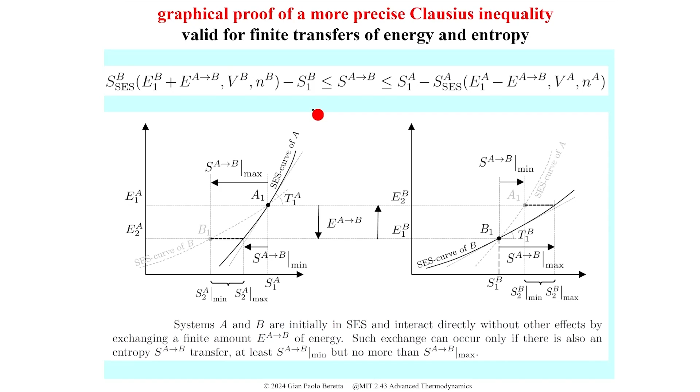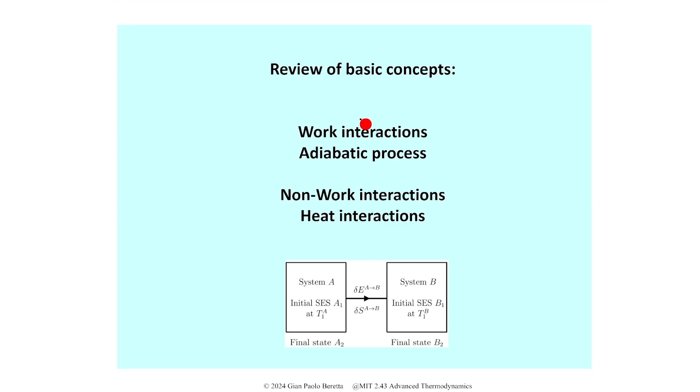So that turns out to be writable as a couple of inequalities. The traditional Clausius statement is, as we've seen it, for infinitesimal amounts of energy transfers. This is for finite, but the concept is the same. So today I wanted to talk about some traditional results. And we still need to define what we mean by heat. First of all, we define what we mean by work.

So work is a mode of interaction in which there is no entropy transfer and no transfer of amounts of constituents. That's, for example, what happens in a weight process. In a weight process, if during the entire process there are no external effects, then the system experiences a work interaction. As you may read here, it says that a weight process may be adiabatic. We call adiabatic process a process in which there are only work interactions. Why may be and not is adiabatic?

Well, because a weight process is a process in which the only net external effect is the lifting or lowering of a weight. The net effect. But you could have some temporary effects that are initially done and then undone, which may not be describable by lifting or lowering a weight. So in that case, it's still a weight process, but during the process there were interactions that may not be work. But for simplicity, a good example of an adiabatic process is a weight process in which there are no entropy transfers all along the process.

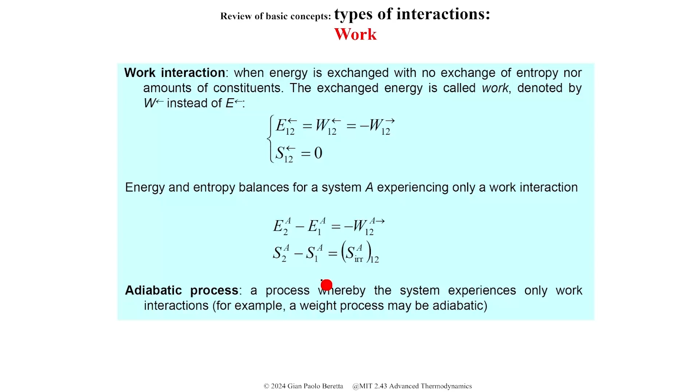Anything that has an entropy transfer, we call it non-work. So non-work is a very broad class of types of interaction. And in this broad class, there is one limiting condition that we call heat interaction. We will see in a moment what's the defining idea behind what we call heat. It is a limiting process, and it doesn't exhaust all the possible non-work interactions. So not all non-work interactions are heat.

And in fact, I already anticipated last time that during a heat interaction, we have a very well-defined ratio between the energy that is exchanged, that we call heat, and the entropy that is exchanged. Energy over entropy is the temperature at which that interaction occurs. So in order to characterize a heat interaction, we only need to say it's heat, how much energy is transferred, and what is the temperature at which it is transferred.

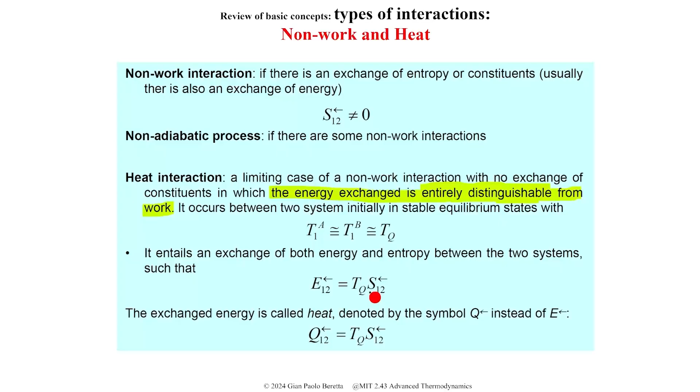But what's the defining criterion for heat? One way to put it is we want to define an interaction which is completely distinguishable from work. So an interaction in which these two systems, say system A and system B, exchange energy and entropy, and no fraction of the energy that is exchanged between the two can be recognized as work.

What does it mean? All right, we do it operationally. Let's say that we extract some energy from system A. And let's suppose that we intercept that energy, and before giving it to B, we feed it to some machinery that will try, at its best, to split that energy into a part that is recognizable as work and the rest.

Okay? So this, traditionally you would call it a Carnot engine, or let's call it a cyclic machinery. Cyclic because it has to return to its initial state, and so whatever it does, it's not because you consume the machine, but because of the operations of the machine.

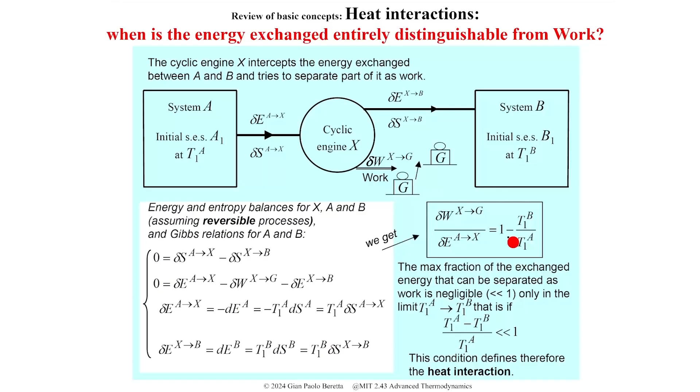We will call heat only in the limit in which this ratio goes to 0. And that goes to 0 only in the limit in which the two temperatures get equal or very close to one another. And in terms of that train of inequalities we have seen, the Clausius inequality last time, that interval of values, if the two temperatures are equal, shrinks to a single value, and therefore we get a definite entropy transfer for a given energy transfer. And that's how we get the famous equation that delta S, the entropy exchanged, is the energy exchanged over T, so Q over T.

And of course, I have stressed it so many times, but we notice that we are defining heat here using entropy. Usually, it's the other way around. The traditional expositions start from some hand-waving definition of heat, and then some definition of temperature, and then Q over T becomes the entropy. That's what I call the hand-waving heuristic definition of entropy.

That, to be frank with you, is what got me started with this subject, because I was so unhappy with the way the subject was explained to me that I wanted to study more. So it's funny. You hate a subject because you don't understand it, and then you come to love it because you want to understand it.

All right, but how does this definition match with our usual understanding? Because if I ask you what's heat, you would say heat is the energy that is transferred between systems at different temperature. Well, we just said no. Heat is the energy transferred between systems at the same temperature. So is there something wrong? And in fact, there isn't. Because think of the typical model that we adopt in heat transfer.

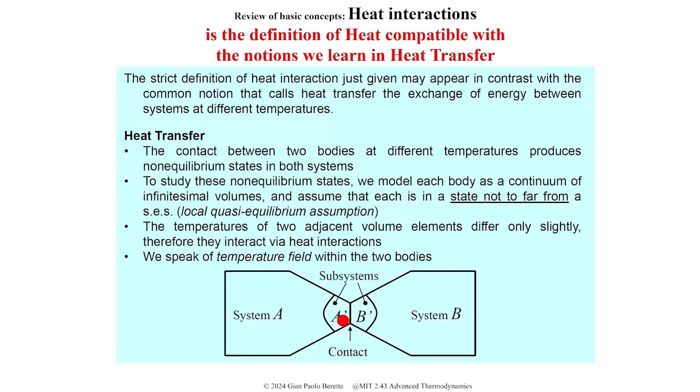This describes what I just said for, say, a solid. Suppose we concentrate on this infinitesimal element of solid or continuum, in which the coordinate is one-dimensional, between x and x plus dx. So it's infinitesimally thin, and it is in contact with the element to the left and the element to the right. For simplicity, let's study a steady state situation and make the energy balance and the entropy balance.

If I make the energy balance for this lamina, I put on the left-hand side the rate of change of the energy of the lamina, and on the right-hand side the net contributions of the interactions to which it is subjected. Assuming it is a heat interaction, it receives Q dot from the left and gives Q dot to the right. If these are balanced, the energy balance says the rate of accumulation of energy is 0, so that property doesn't change with time.

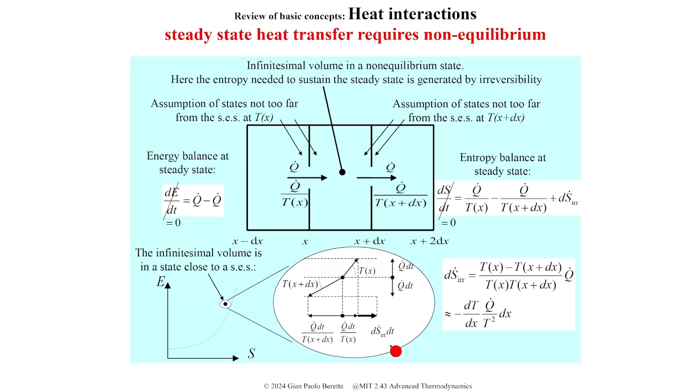But we should not take it too literally, because if we were truly in an equilibrium state, these things couldn't happen. And look at it this way. Let's say that this is the E versus S diagram of my system here, the lamina, the infinitesimal element. Now, I think I have it bigger here. Okay, so I draw the state of this lamina just a bit off the stable equilibrium state curve. And let's see what happens there. Okay, so this is the state.

The lamina receives both energy and entropy from the left. So from the left-hand side there is a pull that tries to pull the state up because it receives energy, and to the right because it receives an entropy given by Q dot over T. The net result is that the state is pulled in this direction. It wants to move there. On the other hand, there is also an interaction to the right, which takes things away. It takes energy down, so it pulls down the same amount. So these are balanced, and therefore the state will remain at this level.

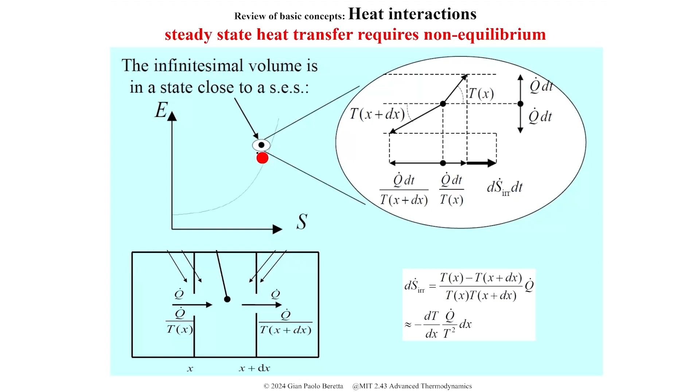This is interesting because it is the local equilibrium model that we are used to using in fluid mechanics, but you can improve. And people are doing extensions of fluid mechanics treatment in which you deal with this little difference in entropy, because maybe you can assign a temperature, but the entropy of this state is slightly less than the entropy of a truly equilibrium state at that temperature. And that difference in entropy sometimes has an importance for certain applications. Okay.

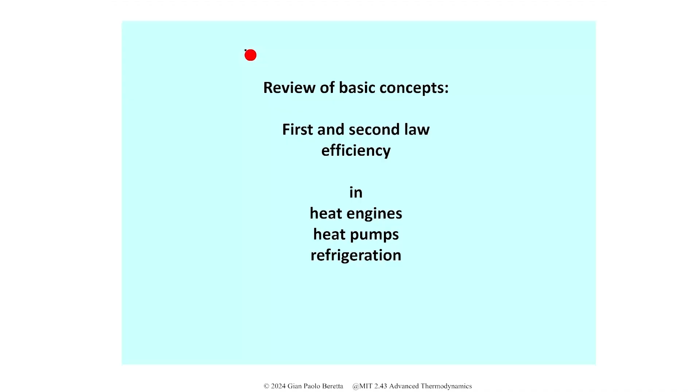So now I wanted to talk about these very traditional ideas of heat engines, heat pumps, and refrigeration units, and see the energy and entropy that flows, and also it gives us the opportunity to define what we mean by first and second law efficiency of devices like this. So let's start from what we are seeing. So let's do it our own way.

Suppose we take the Clausius inequalities that we have seen the other day, and remember that these subscripts over the inequalities indicate what the condition should be for the strict equality to hold. And here, if you remember, we have a strict equality if the system is in a stable equilibrium state and ends in a stable equilibrium state, and it is a reservoir, so that the second derivative is equal to 0.

So let's consider our system to be a reservoir at temperature TA. I drop the subscript 1 because for a reservoir there is always one temperature for all states. And let's assume that also system B is a reservoir. So also for B here I have an equal sign. Okay?

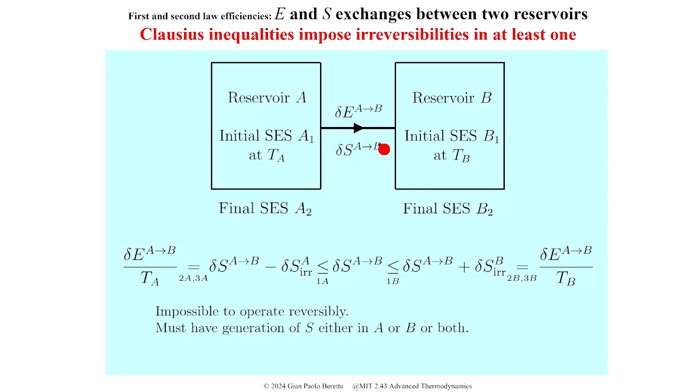So it is necessary, if I transfer energy from a reservoir to another reservoir at a different temperature, that some entropy be generated by irreversibility in either one, because there are no other systems around. But suppose we interpose a machinery in that exchange. Well, in that case, it is possible to have things operate without irreversibility, so without entropy production.

This is the entropy balance for the machinery. It says that if the machinery produces some entropy by irreversibility, it must be equal to the difference between what it puts out and what it receives. And this is the energy balance for the machinery. It says that it can produce work if it can manage to give to reservoir B less energy than it receives from reservoir A.

Okay. So it is possible to assume that everything has no entropy produced by irreversibility. So no delta S here in system A, no delta S here in system B, and also no delta S here in system X. In that case, from the entropy point of view, the machinery simply passes the entropy that comes from reservoir A and gives it to reservoir B.

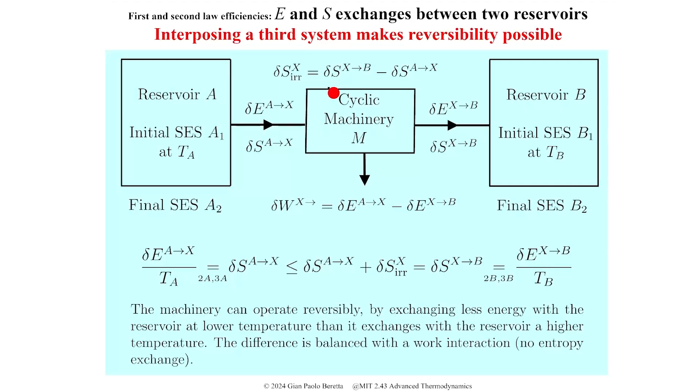But the machinery is there just to recognize that in order to pass that entropy to system B, it doesn't need to give it all the energy it received from A. There is an unbalance, a difference, which can be transferred out by means of an interaction in which there is no entropy transfer: work. Okay, so that's the idea of the heat engine.

Machinery that receives heat from a reservoir at high temperature. This is a heat engine between thermal reservoirs, because you could also have heat engines between systems that are not reservoirs. You take a big piece of steel out of a steel making plant, and I want to recuperate the energy that it has before it cools down. That's a way of recovering energy from industrial processes. And of course, as I cool it down, the piece of steel decreases its temperature, and so it's not a reservoir.

That doesn't mean we cannot compute also for that situation what is the maximum work that we can extract. But that's another situation, and the maximum work we can extract in that case is not the Carnot coefficient. Whereas here, if you do energy and entropy balances, and here they are, I'm going quickly and not into the details, I'll just give you some ideas by following the flows of entropy. But here is the full glory of the balance equations for the machinery, from which you can compute the work.

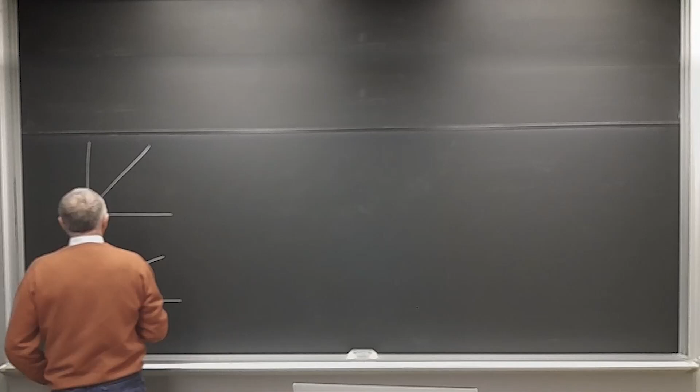Let's view it from the point of view of entropy flows. Actually, maybe we can also do it in terms of E versus S diagrams. So this is reservoir A, and this is reservoir B. And I'm extracting some energy, so I want to take this much energy out of system A. Clearly, there are no states here, so I need to extract also some entropy, at least this much.

But in order to extract that entropy, I need another system. That's why I need reservoir B that picks up that entropy. And so it will end up here, provided, since there are no states to the right of the maximum entropy, I also provide some energy. And that energy is this much. It's Q received by B.

Okay. So the difference between this and that is the work. You can also, if I draw a line with the slope of reservoir A here, this is the work that I have extracted. Actually, this is W rev, because I have assumed that system B takes just barely the entropy that is being received by system A. So the entropy comes from A. The machinery doesn't add because it's reversible. It doesn't produce additional entropy. It simply has to transfer it to system B.

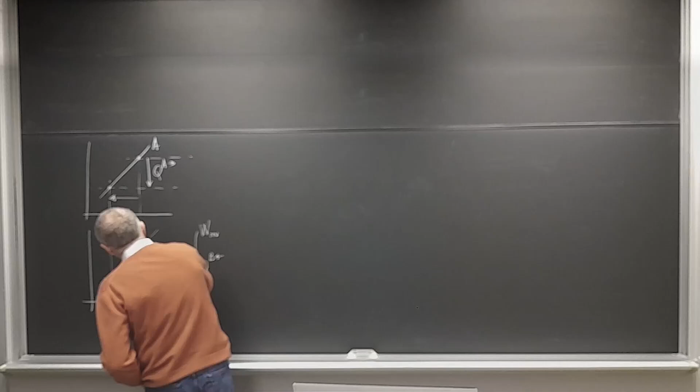If we have an irreversible operation, so if the machinery is irreversible, like most practical machineries, and therefore it produces some entropy, that entropy will also need to be disposed of into the environmental reservoir, and therefore it will require more energy to flow. So in system B, I need to add not only this entropy, but also the entropy that is produced by irreversibility. So that is S produced in the machinery, and the machinery is called M. Okay.

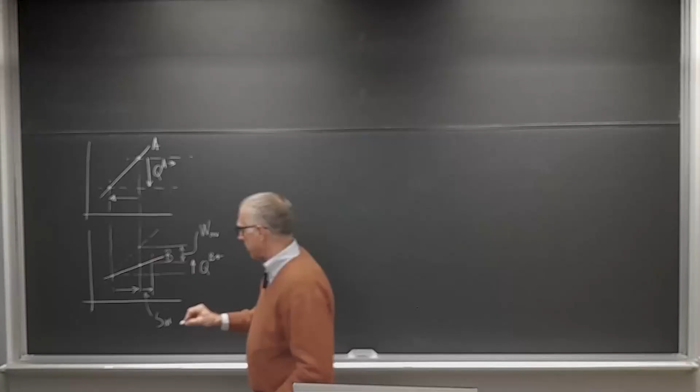So system B ends up here. The amount of Q is higher, and therefore the amount left, the difference, which is what will be transferred as work, is less. Okay. Good. So we have seen it in various ways.

Now, typically, one defines the efficiency. Actually, most of you probably remember that this ratio is not called the Carnot coefficient like I'm calling it, but it's called Carnot efficiency, okay? Which is true in the sense that I can define an efficiency. We are going to call it here first law efficiency, as the ratio of the useful work divided by the energy of the resource that you have used. In this case, the resource is the hot reservoir, so the energy extracted from the hot reservoir. So this ratio is the first law efficiency.

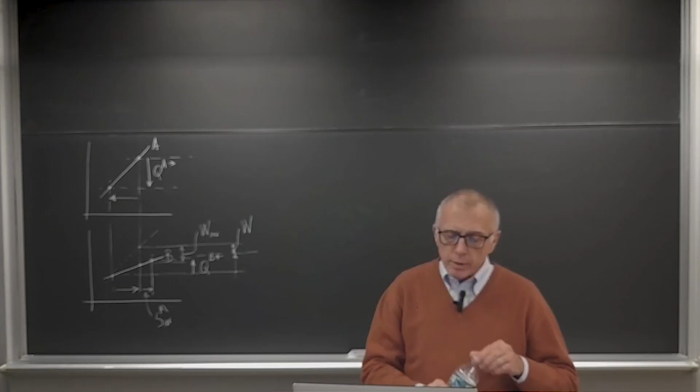What is somehow inconvenient of first law efficiencies is that usually one says, if something is 50% efficient, why aren't you doing better? There is 50% room for improvement. Not here, though, because there is no way. Suppose you have TA equal to 600K, and TB is 300K. So the Carnot coefficient is 1/2, 50%. That's the maximum you can do. There is no improvement. You cannot improve.

So people have introduced the second law efficiency, which compares what you actually obtained, in the numerator, to the maximum that you could have obtained given the constraints and the physical laws, so without violating anything. Okay, so in that case, this ratio for the reversible case is 1, so it's 100%. And if the efficiency is 100%, there's no room for improvement.

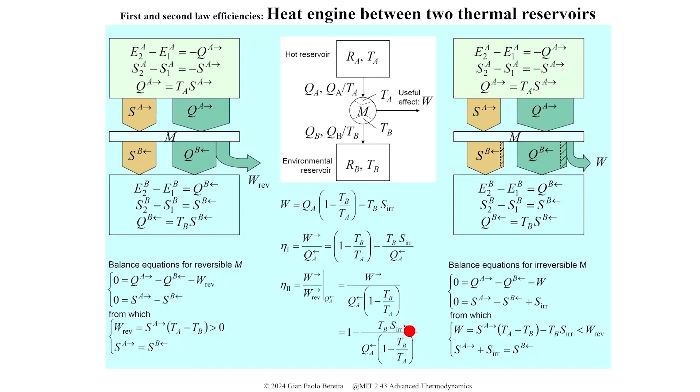Okay, so let's do even more quickly the same idea, but for a refrigerator unit. It's again a situation in which I have two reservoirs, TA and TB, and I identify the environment as the system at higher temperature now, and the other system at the lower temperature is, for example, the refrigerator cell, the room that you want to keep refrigerated.

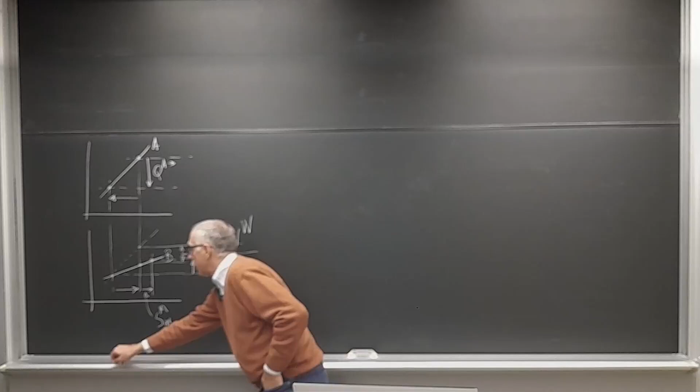And you want to keep it refrigerated, so since typically there are heat losses from the walls of this refrigerator, you need to compensate by removing heat. So the unit wants to extract heat from a reservoir which is at lower temperature than the environment. So let's do again the construction here.

Now I have my system B, which is the refrigerator room. You want to extract energy. And as usual, in order to extract energy, you need to extract also entropy. So this is QB out, and this is SB out. So if I have this entropy going somewhere, I need to put it to another system.

Now this system A, which is my environment, is there, and I would like to give it this much entropy. But in order to give it, I also need to give some energy, which is actually higher than this one, because the environment is hotter, so it has a higher slope.

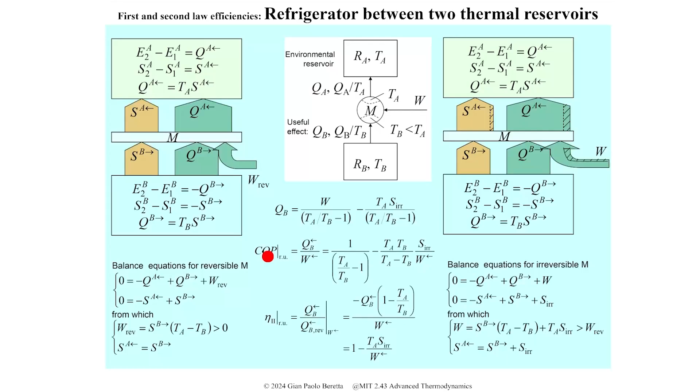The last of this series of traditional machineries is the heat pump. The heat pump is very similar to a refrigerator, more or less the same equations, except that now what switches is the position of the environment, the environmental reservoir. Whereas for the refrigerator you were extracting energy from something colder than the environment, in the heat pump you want to put energy in a reservoir which is hotter than the environment. So now the environment is system B.

But the idea is more or less the same, except that the useful effect now is not the cooling of B, but the heating of A. You want to heat up something like the house using a heat pump, which is nowadays being done worldwide, at least in places where you need heating in the wintertime. And so the useful effect is QA. Therefore, you define a different COP. It's called COP, but it's a different definition.

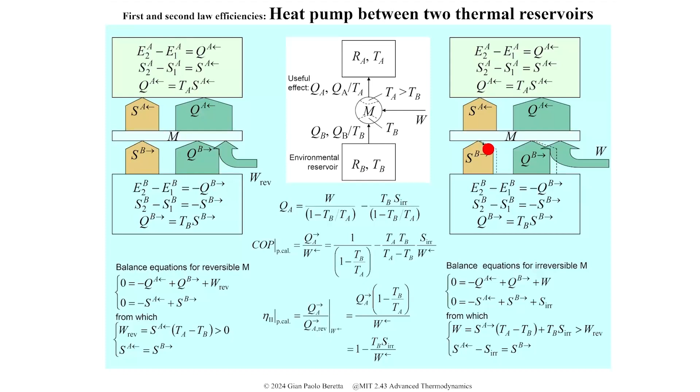So since now we are talking about some practical aspects, let's talk about another chapter of thermodynamics that has to do with establishing the properties of substances at stable equilibrium. This is an important chapter. Many scientists have devoted their lives to constructing the properties of substances. For example, to stay here, Professor Keenan in 1940, or maybe earlier, spent a lot of time developing the steam tables, which are the properties of water.

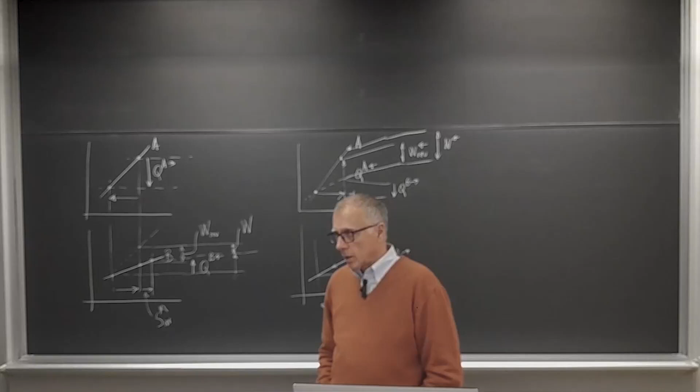So how do we measure properties of substances in stable equilibrium? Well, many of the tools that we have are related to the conditions for mutual stable equilibrium that we have developed, like equality of temperature, equality of pressure, equality of chemical potentials. The good thing is that if you have a thermometer, what is a thermometer? A thermometer is a system in which, in some way, you have put a scale in which you can read the value of the temperature.

Then what you do, you stick it in contact with the system you want to measure, and you leave enough time so that you convince yourself that the two systems have reached mutual equilibrium. And if you are convinced that they are in mutual equilibrium, then the theory says that the two temperatures are equal. So by reading the temperature of the thermometer, you have measured the temperature of system A, of which you may know nothing. So it's an indirect measurement of a property.

Similarly, the manometer: you can construct a manometer so that you can read out on a scale the value here. You put it in mutual equilibrium with your system by drilling a little hole in the boundary, with either a little piston or some moving interface like here.

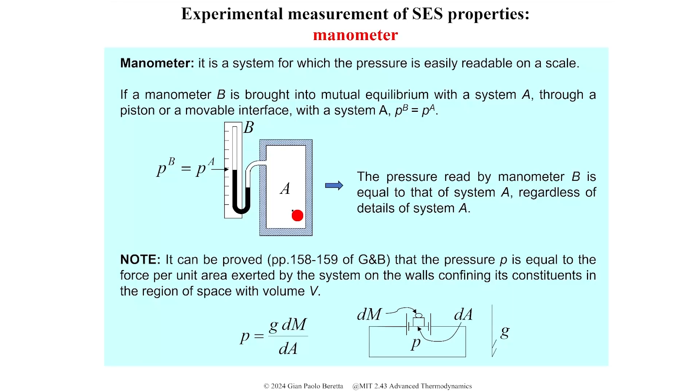If you are convinced that they are in mutual equilibrium, reading the pressure of B gives you information about the pressure of system A. So this is one way of measuring it. Yeah.

This is just to remind of that proof that I don't want to go into details of, but that shows why the pressure can be measured by measuring a force per unit area anywhere on the boundary of your system. So you take the boundary of your system when it is in stable equilibrium, drill a hole, and substitute that piece of wall with a movable wall.

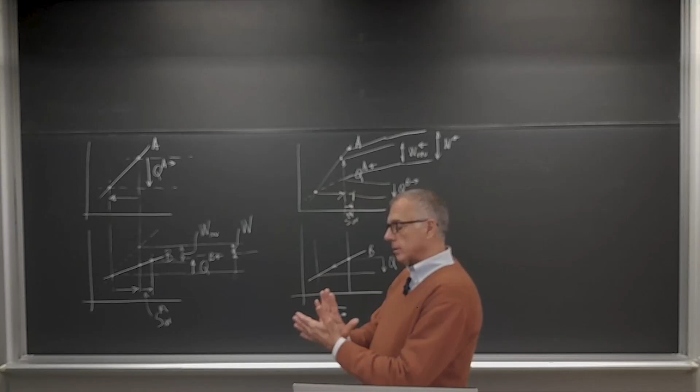And then you find a force per unit area that keeps that wall where the original one was. Once you found it, you have measured the force per unit area that balances the pressure of your system. And when you are in stable equilibrium, that force per unit area is equal no matter where you go and do this procedure. Whereas off equilibrium, you can always measure force per unit area, but it may be non-uniform, not equal everywhere. And there is no pressure because you're not in equilibrium.

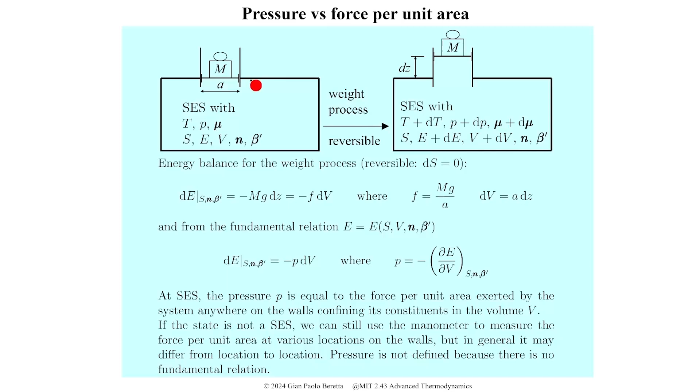Another kind of measurement that we can do is like the so-called Joule apparatus, in which you input some mechanical energy in your substance, in a piston or in a variable volume or in a constant volume container. You put some energy in, wait for the system to go to a new stable equilibrium, and measure how much the temperature has changed for your system.

So mg delta z represents the amount of energy that you have put in the form of work. So you produce a work interaction and put energy into your system. Let it relax until it reaches equilibrium, so new temperature. Compute the difference between the new temperature and the initial temperature, delta T. This ratio turns out to be equal to the partial derivative of this property that we're going to define in a moment, and that's the property that we call heat capacity at constant pressure. It's a stable equilibrium state property. We obtain it from the fundamental relation.

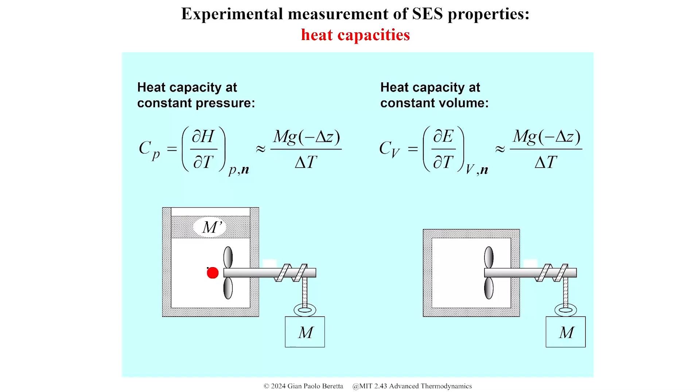There is one heat capacity that is equal to the same ratio when you do the experiment at constant volume, and there is another heat capacity when you do it at constant pressure. So let's start from the constant pressure, because this gives us also a procedure to define the enthalpy, and to get to the derivative that turns out to represent the result of this measurement. So it's important because it is the way in which you measure that property.

Let's do it starting from the fundamental relation in energy form. And this is its differential. So H, in a moment we will see that this H is a particular transform of the fundamental relation when we change variables. But for the moment, let's just take it as an abrupt definition. Let's say that we call H the sum of energy plus the product of pressure and volume. We call it enthalpy.

Then, by taking the differential of this expression and recalling that the differential of a product is equal to P dV plus V dP, and where I see dE, I use the differential that I have written up here. So I substitute, and this is what I'm left with. I can view this expression as the differential. So you see the independent variables are under the d, so dS, dP, dn. So this would be the differential of a function in which H is a function of S, P, and n.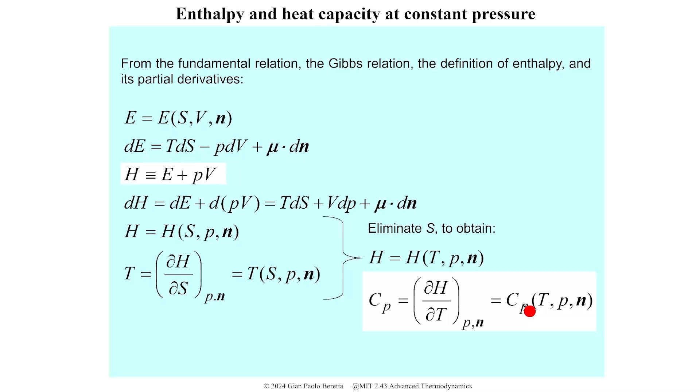So pressure and temperature we can measure. Heat capacity we can measure with this instrument here. And so this is a fully measurable function. A similar procedure we can follow to define the heat capacity at constant volume.

So we start again from the fundamental relation. And notice that the temperature, which is the partial derivative of E with respect to S, being a derivative of a function of these variables, has the same independent variables, so it's also a function of S, V, and N. And also here, play the game of eliminating the not so easy to measure property, entropy.

So solve this as S as a function of T and substitute up there to obtain a new function in which the energy is expressed in terms of the independent variables temperature and volume. These are things that are easy to measure, because temperature you measure with the thermometer, volume you measure with the stick.

Okay, so the first derivative of this function, the partial of E with respect to T, is called the heat capacity at constant volume, and it is the thing that you measure with the Joule apparatus at constant volume. So we'll take that.

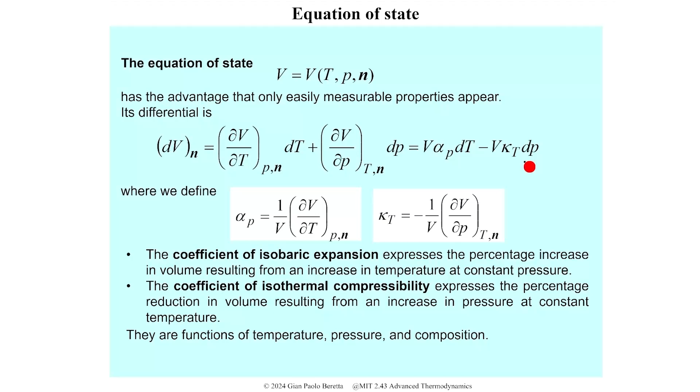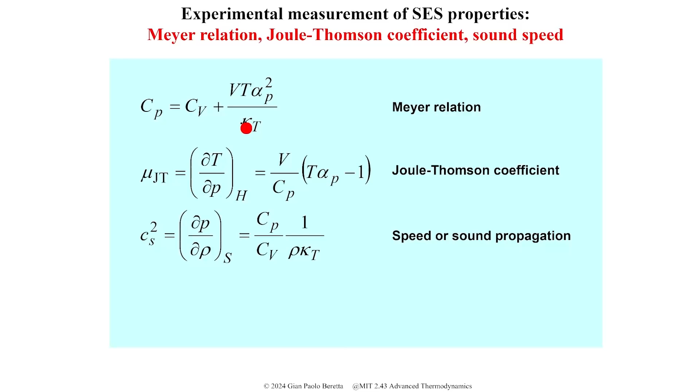And also the Meyer relation shows that Cp, Cv, alpha P, and kappa T are not independent. So you don't need to measure all four of them. You just need to measure three. Let me skip that one for a moment. No, I need it.

Okay, in order to measure chemical potentials, I do need first to show that the chemical potentials can be written as functions of temperature and pressure.

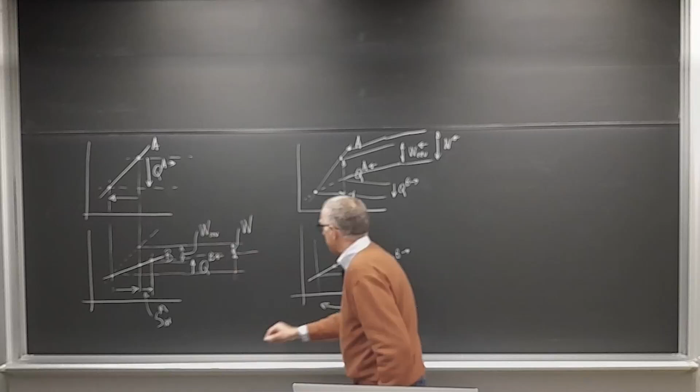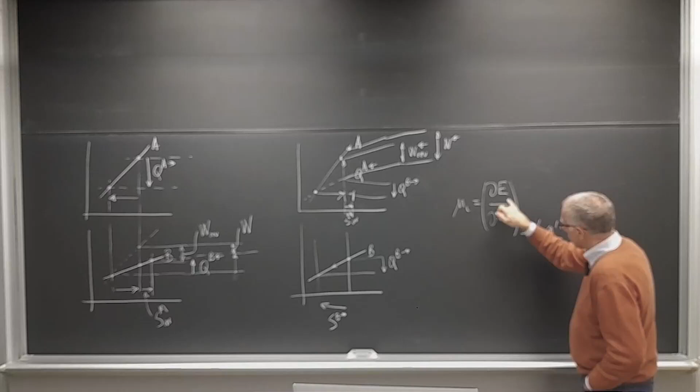So, because you see, the chemical potential is defined as the partial of E with respect to N at constant S and V. But that way, it isn't easy to measure because of the S. So mu I is the partial of E with respect to Ni at constant S, V, and all the other N's held, well, I shouldn't say that, where the function that I am taking the derivative of is a function of S, V and all the N's.

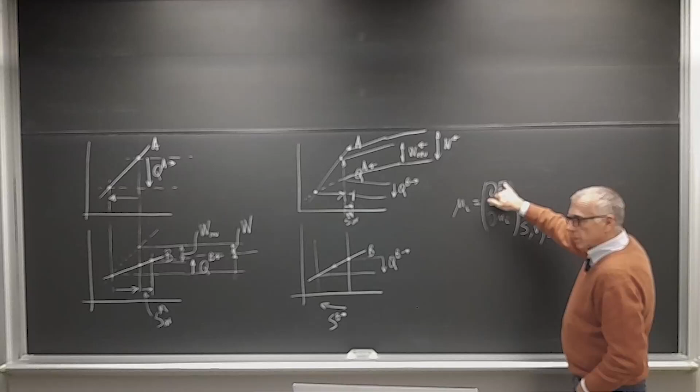However, when you view it this way, it's not easy to measure because I don't have an energy meter and I don't have an entropy meter. So the trick is to change variables. And one way to do it is to define a function which is called the Gibbs free energy. For the moment, think of it as just an arbitrary definition. So G is defined as energy minus TS plus PV. Write the differential. Use the differential of a fundamental relation in order to express dE. And here is what you are left with.

This expression shows that you can view this function G as a function of the independent variables that appear under the d of the differential, so the temperature, the pressure, and the amounts. So G has as natural variables T, P, and N. And since this is the differential of that function, the chemical potential can therefore be written now also as the partial of G with respect to Ni. And since it is a partial of G, which is a function of T, P, and N, it's also a function of just T, P, and N.

Okay. So the chemical potential, we would like to measure it. It is very important to determine the properties of multi-component systems. But it cannot be measured directly. There is no chemical potential meter. However, it can be measured indirectly via the definition of what we call the partial pressure of a component in the mixture.

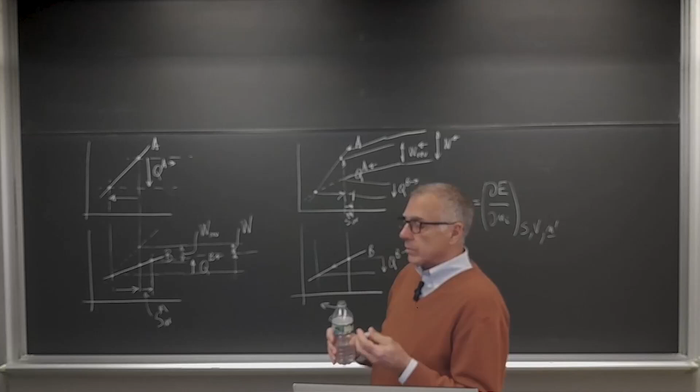Okay. When we are in mutual equilibrium across this membrane, we have proved also the other day that the conditions for mutual equilibrium are equality of temperatures. So the temperature of system II must be equal to the temperature of the mixture, and equality of chemical potentials for the substance that can be exchanged. So the substance is I, and so I need that the chemical potential of substance I of the mixture must be equal to the chemical potential of the pure substance I just on the other side of a semi-permeable membrane. Okay.

Okay, here I also put the functional dependence because I used what we just proved before, that the chemical potentials can be written as functions of T and P. And so these are the functions that we're going to use for this measurement. Okay, and so by looking at this equation, which is required by the condition for mutual equilibrium, we see that inside the independent variables are all easily measurable things: temperature,

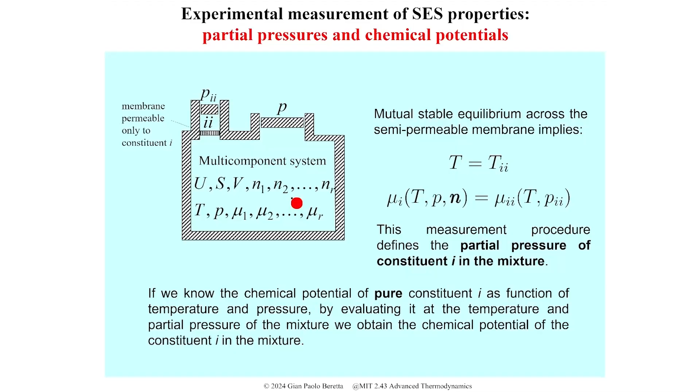So here is a little summary of properties that we have talked about so far. Energy, entropy, also the volumes and the parameters, the amounts of constituents that enter in the definition of our system. These properties are defined for all states, equilibrium and non-equilibrium.

Then we define some other properties based on the fundamental relation for stable equilibrium states. So clearly these are defined only if you have a fundamental relation. So they are defined only for stable equilibrium states.

Temperature, pressure, chemical potentials, the enthalpy, the Gibbs free energy. The enthalpy, because it's E plus PV, and P is the pressure. Pressure is defined only for a stable equilibrium. Or the Gibbs free energy has the P and the T also. So it also is defined only for stable equilibrium states.

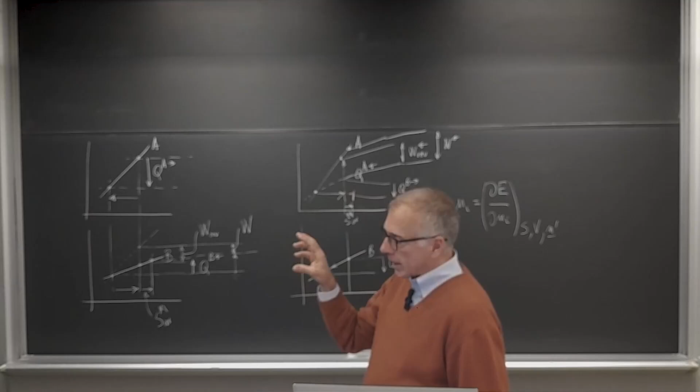And then we also defined these four properties today: the heat capacities, the coefficient of expansion, and the coefficient of compressibility. These ones also are restricted to equilibrium states, but they're even more restricted because of some of those mathematical steps. For example, if I go back here, when I do this eliminating one variable, I can do that only if some derivative is not equal to 0.

So, for example, if the partial of T with respect to S is equal to 0, I cannot invert that function because it's not monotonic, and this is what happens, for example, when I have two-phase states, like liquid and vapor coexisting. In that case, some of these functions are not defined, or, which is the same, take on infinite values.

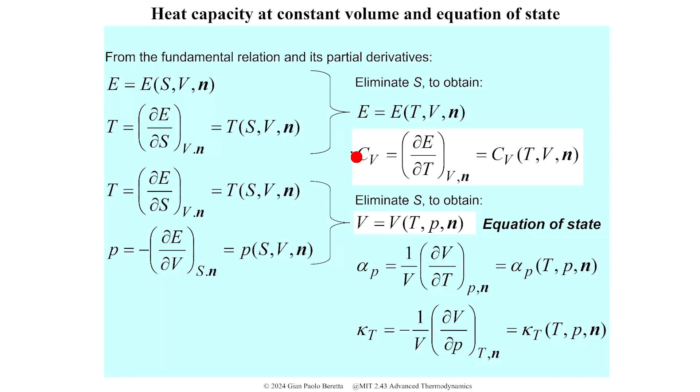Okay, so we go back to here. Now, this also says that if we do our measurements, for a given substance or for a set of mixtures, we can measure experimentally these functions: alpha P as a function of T, P and composition, kappa T as a function of temperature, pressure, and composition, the heat capacity at constant pressure as a function of temperature, pressure, and composition, and the chemical potentials as a function of temperature, pressure, and composition.

If I have all these functions, then with these functions I can reconstruct the fundamental relation. So I know everything that I need to know about the stable equilibrium states of that substance. And actually, the reconstruction is done through these relations here. For example, this expression for the energy here can be related to these properties in this way. So if I integrate from one temperature to another, from one pressure to another, this expression, I can get variations in energy.

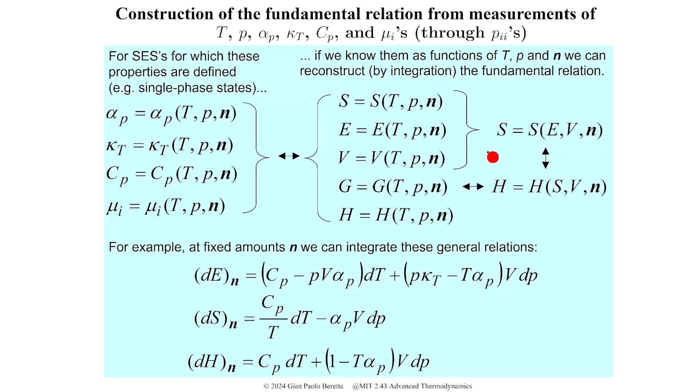The entropy also is related this way. The enthalpy is related that way. And these are general forms that are valid for any pure substance. If you also need to consider mixtures, then you need to generalize this to use the expressions where also the n appears. So in this way, we have a way to measure the fundamental relation of substances. Okay.

Now, yeah, we have 5 minutes, so I can do this.

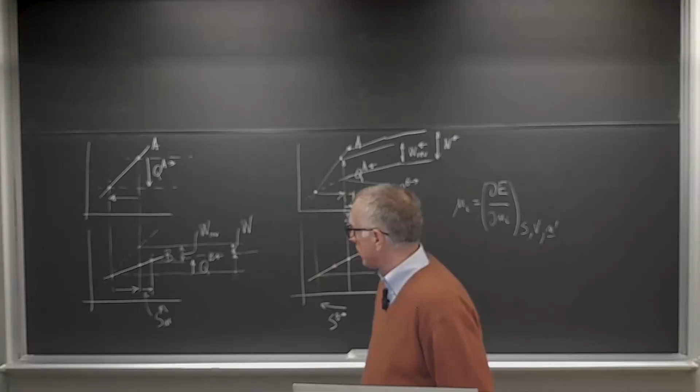I want to show that some of these functions, like the enthalpy and the Gibbs free energy, are obtained as Legendre transforms of the fundamental relation. Legendre transform is a particular procedure that we can explain in this way. Let's start with a function of a single variable. So suppose you give me any function. But to simplify, let me suppose that this function is either convex or concave and monotonic, so that I can invert and play with it.

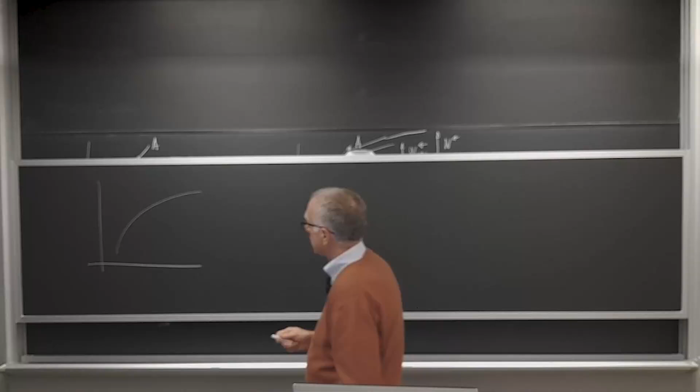Okay. So usually we define a function, I'll call it f of y, meaning that for each value of y, I get a value of f. And as I move y, the function tells me how f moves. But there is an alternative. The idea of Legendre is that there is an alternative description, because that function also has a tangent, a line tangent to every point.

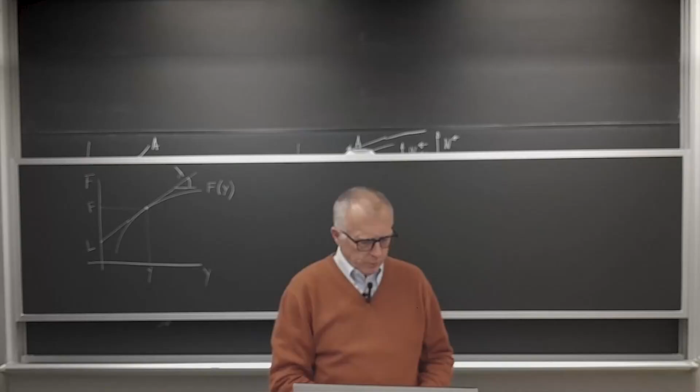Okay. So this tangent is characterized by two items. One that we will call lambda, which is the angular coefficient, the slope of the line. And this other value here that we call L, which is the intercept at y equals 0. Okay. So the idea of Legendre is that if you draw, like it's sketched here, the tangents at every point of the line, you get a family of lines, the envelope of which is your original curve. Okay.

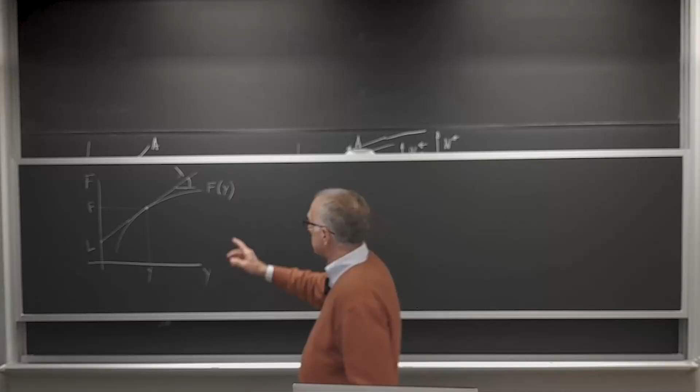Each line is characterized for a given lambda by an L. I change the point, so I take another lambda. Suppose I want this slope this much. Okay, so I fix lambda. So say this is lambda 1. Now I fix lambda 2, and that gives me L2. So selecting a value of lambda selects the point in which the tangent of the original curve has that slope, and therefore when you place your line there, it also selects an intercept. So there is a relation between lambda and L, and that relation is the Legendre transform of your function.

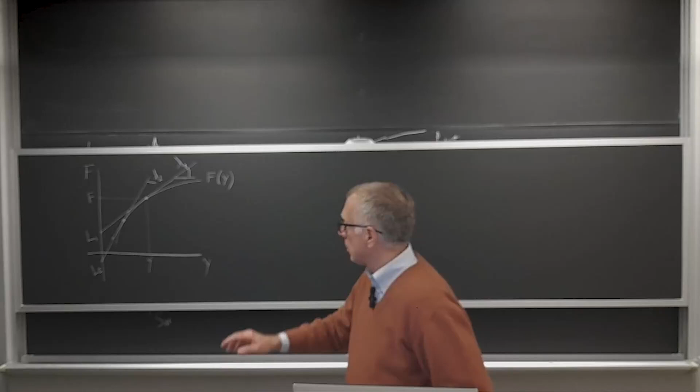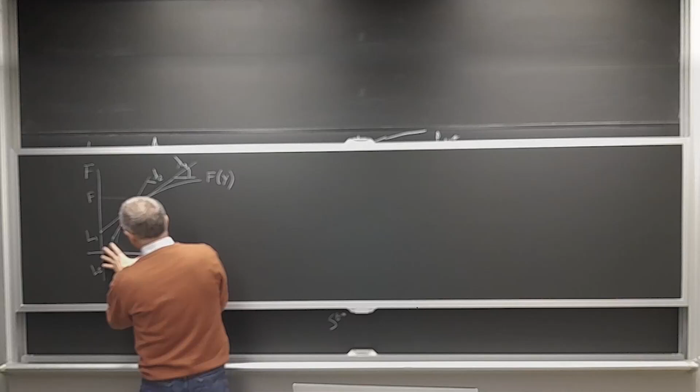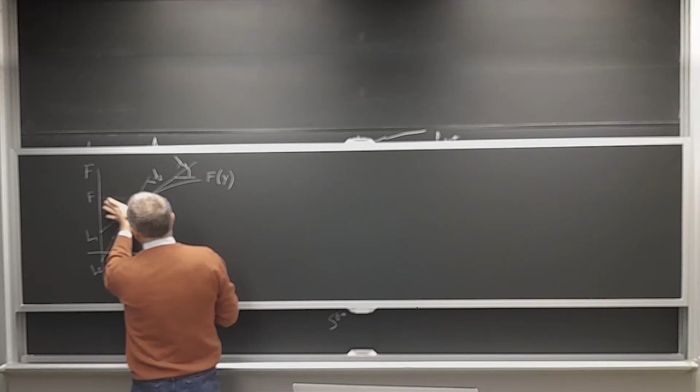The procedure runs this way: you take the function, you write the equation for the derivative, and then you define L by the geometrical construction. So it's the function f minus this distance here. Okay, and this distance here is equal to the horizontal segment times the slope, the tangent of this angle, so this lambda. So L is equal to f minus lambda times y. So it corresponds to that description.